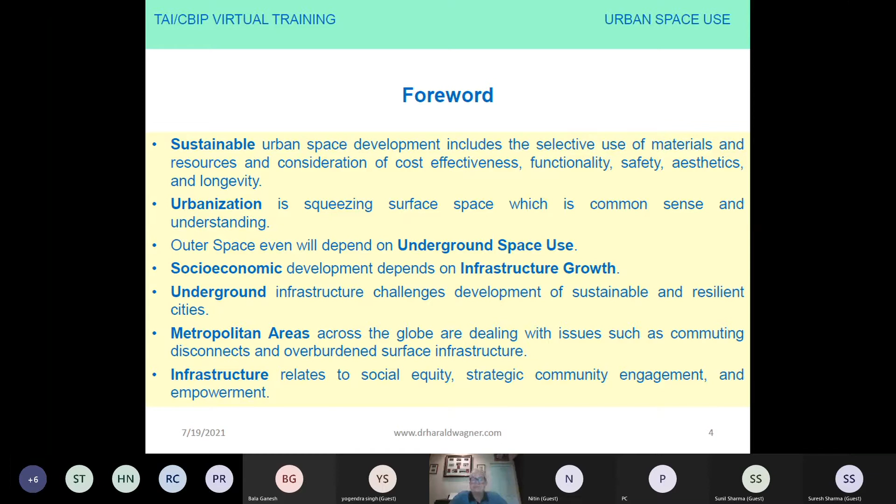The United Nations estimated in 2007 that this was the first time more people have been living in urban areas than in rural areas on a global scale. That means just 1 in 3 people in urban areas globally are living in slum households.

The history of population shows people lived in very low density rural settings, and urbanization trends match this in past centuries. That means when global population was between 1 and 2 billion people, it was not a problem at all because there was enough space at that time.

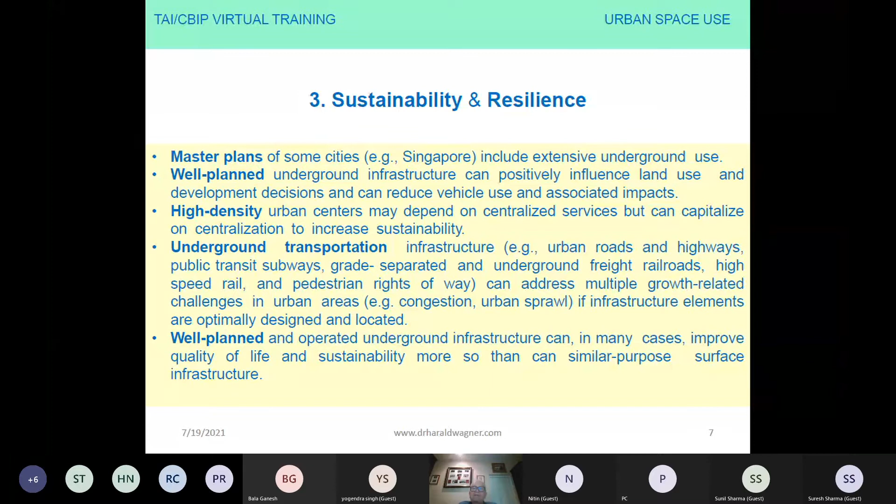In the previous lecture, we have been talking about life cycle assessment and how important it is to make long-term life cycle cost analysis. So this is reflected also in urban coordination. There is relatively little strategic coordination of underground infrastructure development right now in our city planner plans.

The administrative support and management of underground infrastructure, as part of an integrated, multidimensional above and below ground system of urban system, is vital to the development of urban sustainability.

I'd like to give you an example from Bangkok, where I'm living right now, which is to save Bangkok and to stop Bangkok sinking. Major infrastructure investment based on long-term life cycle assessments have to be implemented to provide future sustainable urban living conditions.

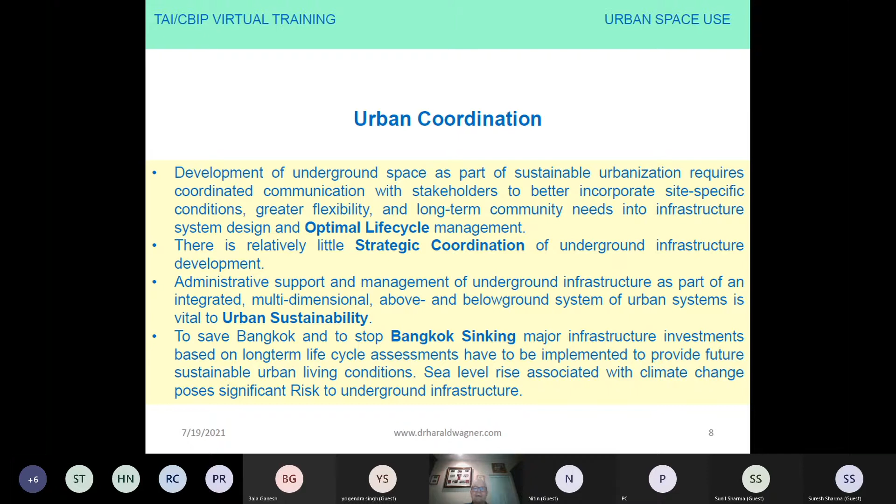Next slide, please. Now I'm going to compare above and below ground and deliberate the complexity of urban infrastructure systems.

So there are several systems which are overlaying each other, and uncertainties which are associated with system design and performance increase with greater and more varied demands on both above and below ground infrastructures.

It's a challenge for engineers and urban planners to better improve whole life cycle facility performance and overall urban sustainability with documented and validated risk-informed approaches to project planning and design, which finally comes to a balance of life cycle needs in terms of service delivery, initial cost, resilience against extreme events, and effective maintenance and operations.

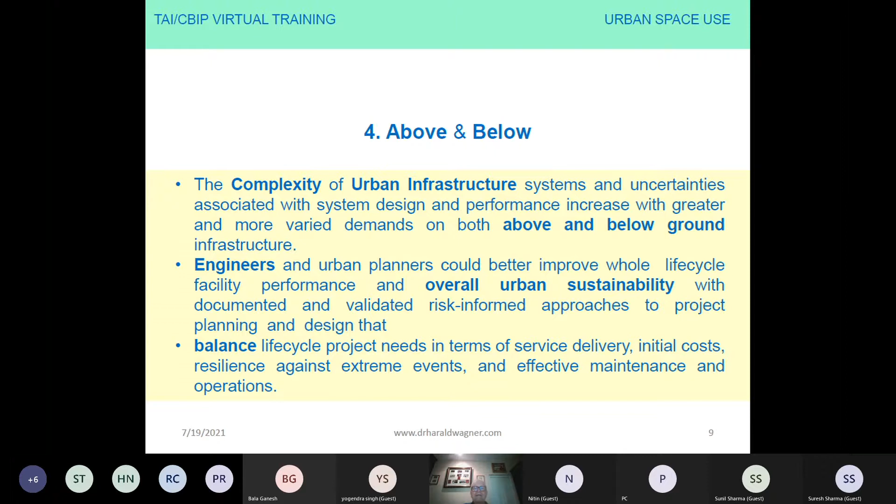There is anecdotal and partial evidence of the positive environmental and financial impact of replacing above-ground transportation structures with underground alignments on neighborhoods worldwide. So this is a big credo for underground transportation.

According to an in-depth review of the City of Boston tax assessing records by the Globe, in the 15 years since the Central Artery Tunnel project, the so-called Big Dig, began, the value of commercial properties along the mile-long strip that this year will become the Rose Kennedy Greenway increased to 2.3 billion, an increase of up to 79% in the value of the commercial properties.

That is significant - all of the above ground infrastructure has significant impact on the value also. If you go underground, the above ground structure increases in value, as shown in the city of Boston. That's almost an increase to double the citywide 41% increase in assessed commercial property values in the same period.

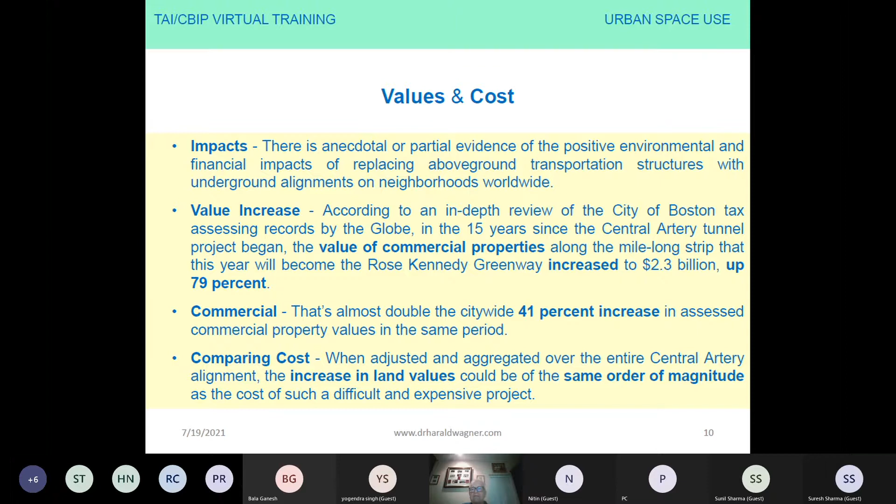The next slide shows or gives an impression of challenges and opportunities with regard to underground transport. The construction of major underground transportation projects often requires significant relocation of in situ underground utilities along public rights of way.

Yes, we still are on slide number 11. The excavation work and relocation needs of the project provide key opportunities for renewing and rationalizing utility provision in an area, to provide for easier future maintenance of those systems.

It can provide an overall benefit to the urban community using a system of system analysis rather than a project by project analysis. So system by system means overlying systems have to be analyzed as well as project by project analyzed.

Sustainability of an underground transportation system is improved when system design allows as much flexibility as possible, taking into account future use, potential for additional transportation lines, and intermodal connections. Sustainability is something provided by the underground structure.

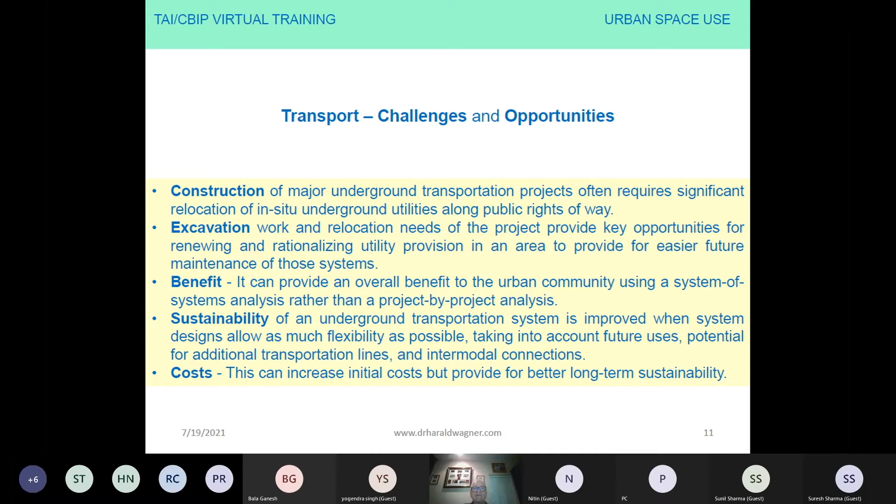And the cost can increase initial cost, but provide for better long-term sustainability. That means that we have to look into life cycle cost analysis in order to get the real picture of the cost of the investment. Next slide.

So let's talk about urban roads and highways. Underground urban roads and highways typically traverse deep below a city from a portal at each end that tie into existing service road networks. That means if we take, for instance, the example of Seoul, capital of South Korea, where we have an underground system of roads and highways extending 600 kilometers north, south, and east-west.

So that's a fantastic solution in order to release and smooth the traffic jams and to reduce the traffic complexities.

Tunnels can avoid building foundations and other in-place services and leave space closer to the surface for other future installations. Tunnels constructed at depth will be the lowest cost among alternative underground solutions if a life cycle cost analysis is prepared and geologic conditions are allowed for and respected.

The barriers to free-flowing traffic can be bypassed, travel times shortened, and carbon emissions reduced for the same distance traveled by surface road. The diversion of traffic from streets allows more pedestrian-friendly environments in the city.

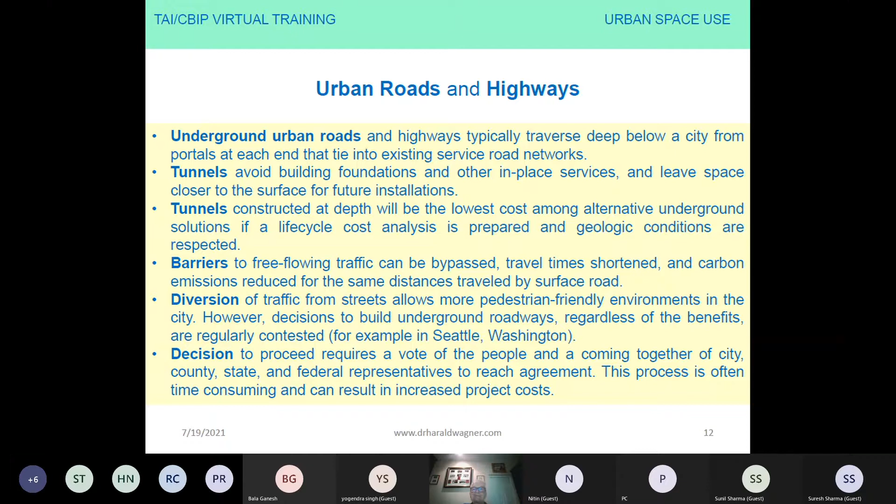Next slide, please. The next slide shows the Central Artery, the so-called Boston Central Artery project, or the Big Dig.

The next slide, please.

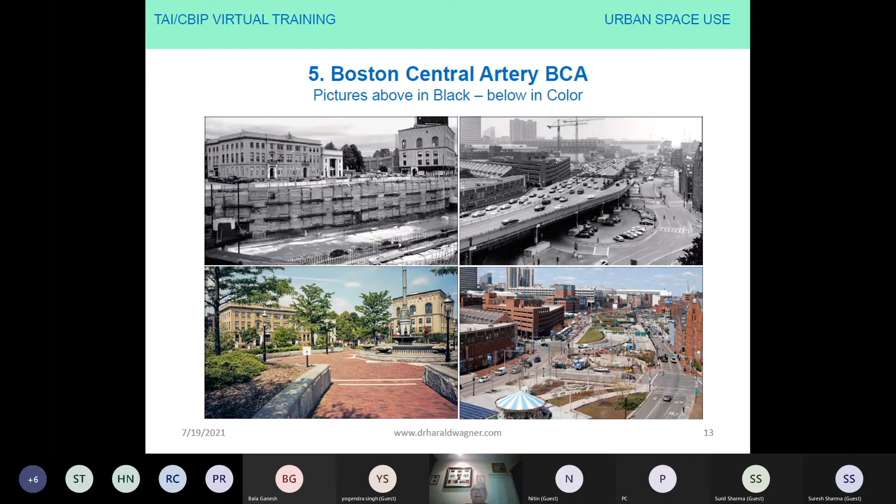When we talk about planning and assessment for a project like Boston Central Artery, the underground transportation tunnel project required rebuilding and relocating existing underground utilities in right-of-way. Building foundations make reuse of underground locations prohibitively expensive, precluding underground parking, tunnels, or other uses in that location. Underground construction may increase cost and reduce flexibility for alternative future use, because most underground facilities remain even after their useful life ends.

A comprehensive planning effort is necessary, recognizing that underground space is a resource that should be used in the best manner possible, rather than letting initial use preclude later use. Similar conclusions have been drawn with respect to limiting space debris in orbits around Earth that may prevent the use of orbits for other purposes. So planning and assessing conditions is of utmost importance.

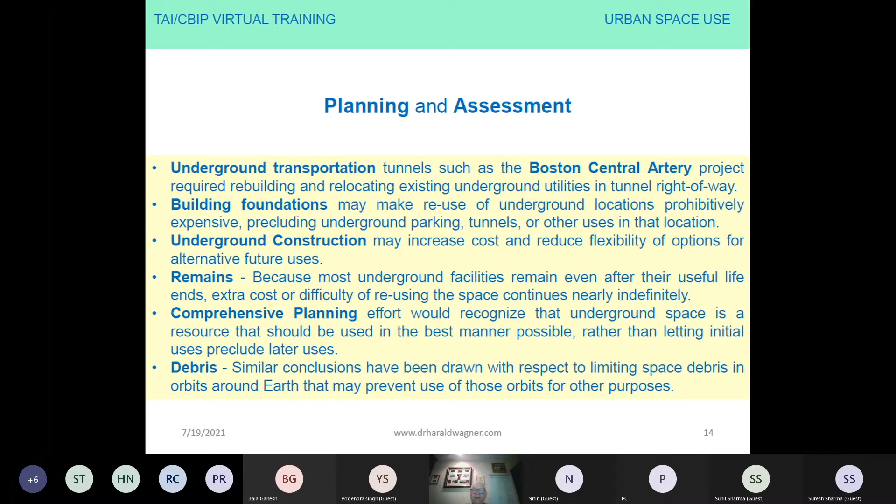Can we go to the next slide, please? This slide shows a plan of the Big Dig, and you can see this is the center of Boston. You can see that Highway Number 1 and the interstate highways are crossing in the middle of the city, and you can also see the arms of the nearby sea.

The Big Dig, it has to be confessed, was completed 9 years late and over budget by an additional $8 billion, for a total cost of almost $16 billion. Additionally, the infrastructure has suffered from a myriad of problems, such as substandard concrete failures, tunnel leaks, a fatal ceiling collapse, and the deterioration of light fixtures, wall panels, and other metal hardware.

Still, there have been many benefits as a result of the project. Traffic congestion has decreased by as much as 60%, along with a significant decrease in air and noise pollution. The space previously occupied by the elevated highway has been replaced with an urban park system, increasing quality of life. The creation of more mass transit has decreased emissions and allowed for increased expansion of the city. The Big Dig shows how transportation engineering can have a massive positive effect on everyday life. It's a wonderful example that confesses a negative aspect, but overall has resulted in very positive results.

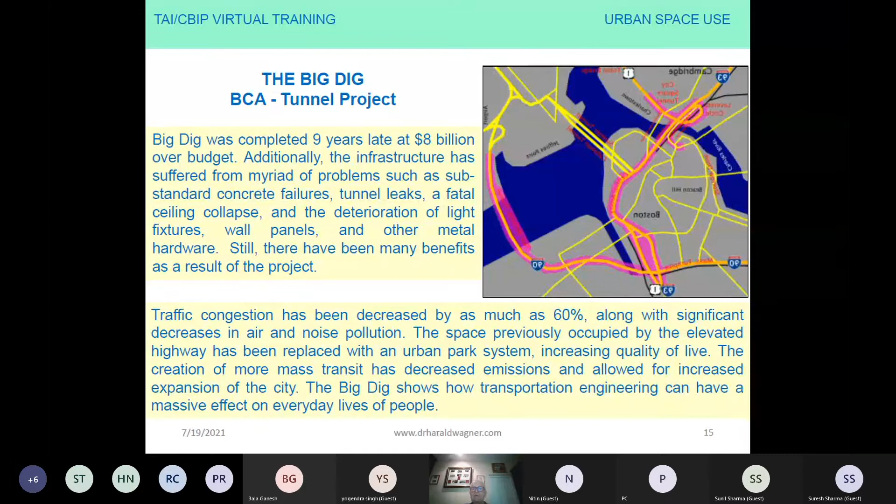Can we go to the next slide, please? This slide explains the reuse of excavated material. The excavated material from the Central Artery project, uncontaminated, was used to stabilize slopes and fill and cap a landfill to convert it into recreational areas. The material was transported in more than 4,400 barge ship loads to the island beginning in 1992.

It was used to cap the landfill with a 2-foot clay cap. The cap created an impervious layer that would serve to keep precipitation from mixing with waste beneath and leaching into the harbor. The excavated fill was mixed with biosolids from several waste composting facilities in New England to create topsoil that was subsequently vegetated to keep the cap in place. Approximately 2,400 trees and 26,000 shrubs were planted on the fill.

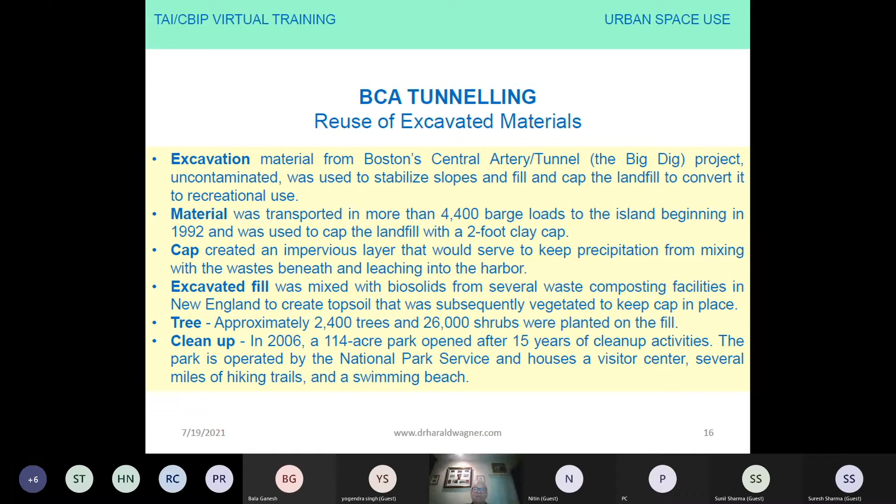In 2006, a 114-acre park opened after 15 years of cleanup activities. The park is operated by the National Park Service and houses a visitor center, several miles of hiking trails, and even a swimming beach for those who want to swim.

Next slide, please. The Boston Central Artery assessment refers to the replacement, and is anecdotal and partial evidence of the positive environmental and financial impact of replacing above-ground transportation structures with underground alignment on neighborhoods worldwide.

A very good example: according to an in-depth review of City of Boston tax assessing records by the Globe, in the 15 years since the Central Artery Tunnel project began, the value of commercial properties along the mile-long strip that became the Rose Kennedy Greenway increased in value to $2.3 billion, up 79%. This nearly doubled the citywide 41% increase in assessed commercial property values. When adjusted and aggregated over the entire Central Artery alignment, the increase in land value could be of the same order of magnitude as the cost of this difficult and expensive project.

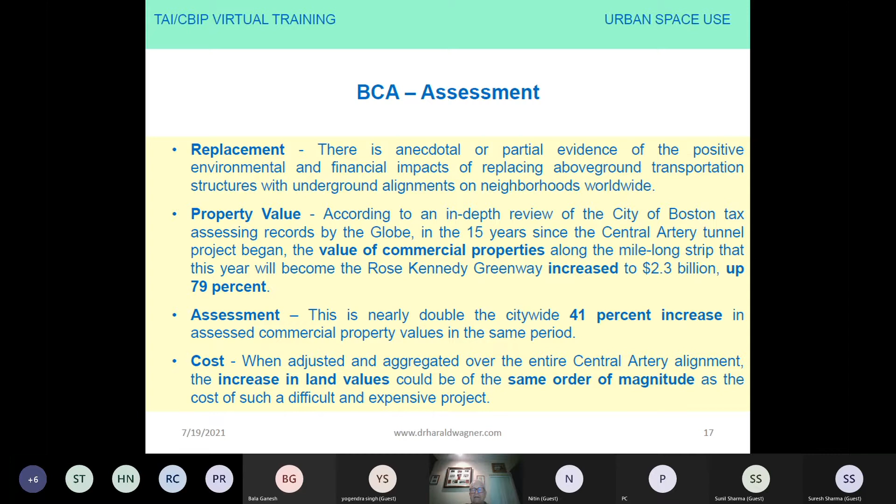Next slide. This slide shows elevated before and underground after the Boston Central Artery project, and the development to become a smart city. This is very important: even within a long tradition and long history of city development, you can make it a smart city if you go underground.

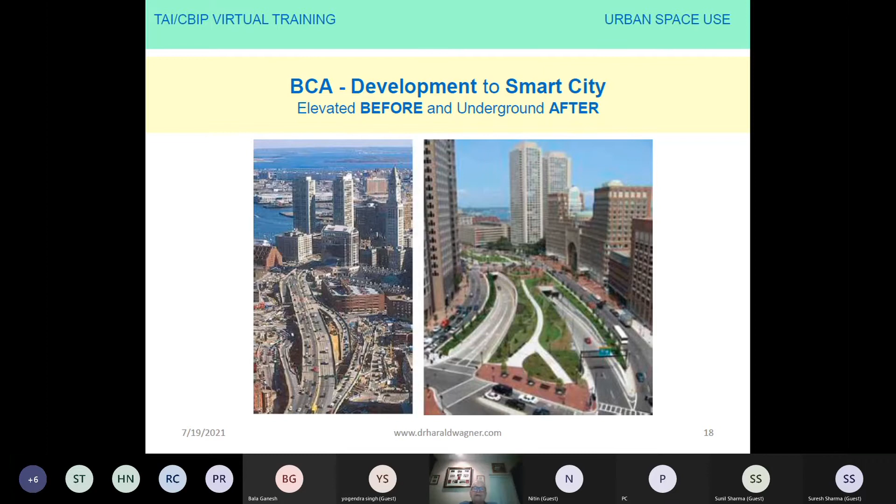That's another project on the other side of the United States. Boston is on the East Coast, Seattle is on the West Coast. A decision was made to bore an urban underground bypass expressway, remove a damaged viaduct, and restore an accessible scenic waterfront.

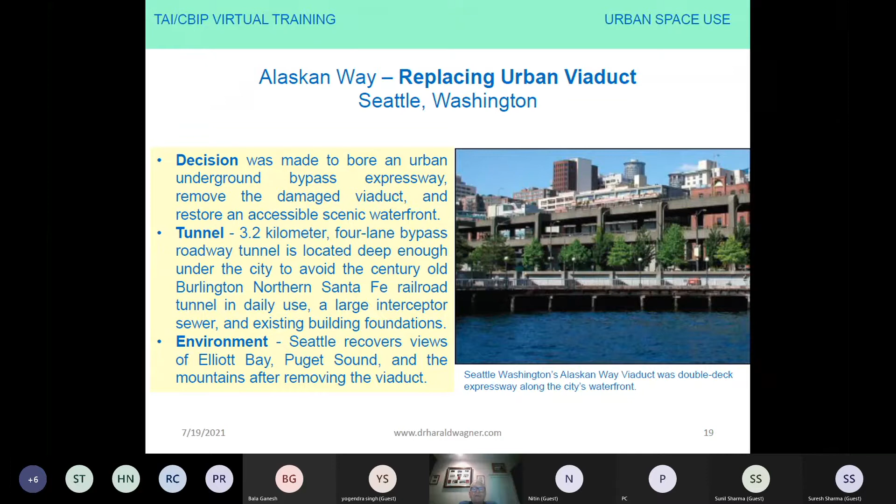The tunnel is a 3.2 kilometer long, 4-lane bypass roadway, located deep enough under the city to avoid the century-old Burlington Northern Santa Fe Railroad tunnel in daily use, a large interceptor sewer, and existing building foundations underground. The new environment for Seattle recovers the views of Elliott Bay, the Puget Sound area, and the mountains after removing the viaduct. We shall see in one of the next slides how this has happened.

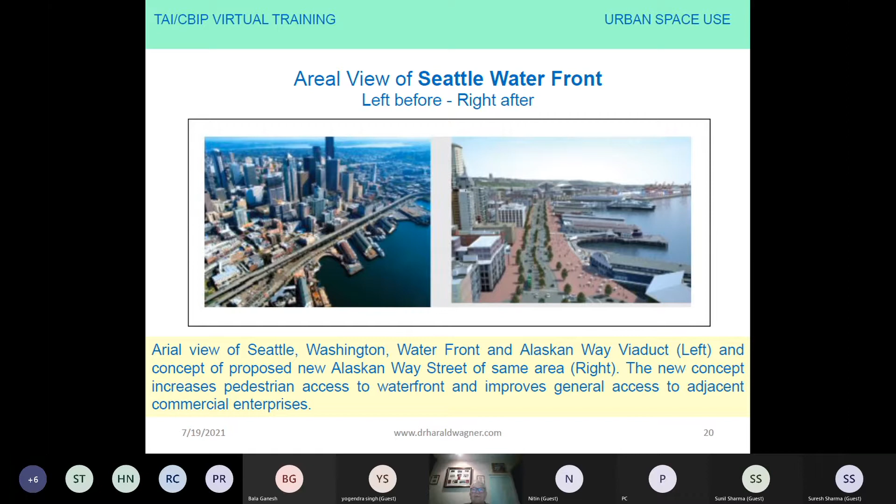It's really fascinating to go there now, if you knew Seattle before the Alaskan Way and now afterwards — it's a huge gain in quality of life. We can go to the next slide, please.

This slide shows what has been done with this tunnel, a 3.7 kilometer long solution. The alternative included a wider, 2-level viaduct on the same alignment, replacement of the viaduct by a wide surface street carrying significant through traffic, or relocation of the highway on a bridge or tunnel over or under Elliott Bay.

Doing nothing was an alternative, but it wasn't really intended, as it would limit traffic growth and create demand for better public transit only through continued, more disruptive road congestion. So the discussion was between different alternatives, and all this was publicly discussed, including all the administrative institutions.

At that time, it was the biggest tunnel, with a diameter of almost 18 meters, in order to house these 2-level roadway lanes.

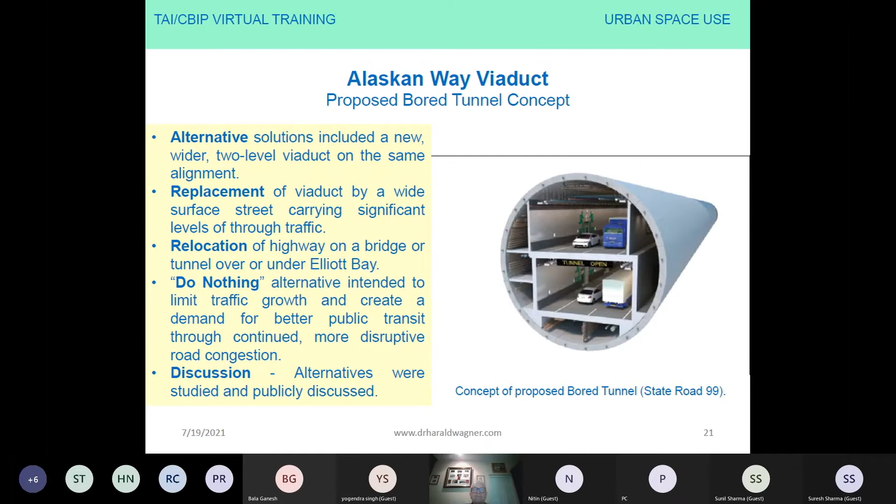The next slide talks about the change of technologies. In our cities we have aging underground infrastructure, which may be susceptible to deterioration and issues associated with changing technologies, changing climate, and societal needs. Underground space development requires a long-term commitment to technological advancement, in an environment friendly to improved planning, innovation, and implementation, all based on proper contracting.

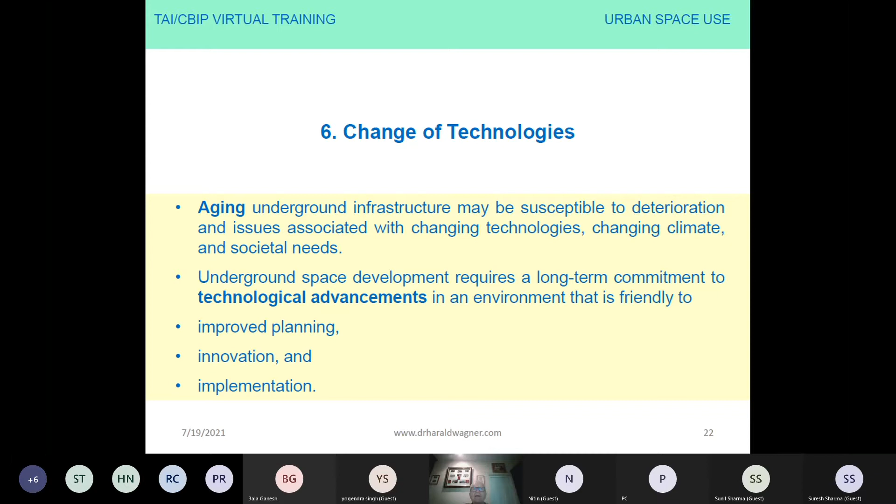The next slide shows what it means to use the underground as a resource. The underground space is a valuable but decidedly non-renewable resource — available but non-renewable. It can enhance urban sustainability only if the underground is thoroughly understood. What does it mean to thoroughly understand the underground?

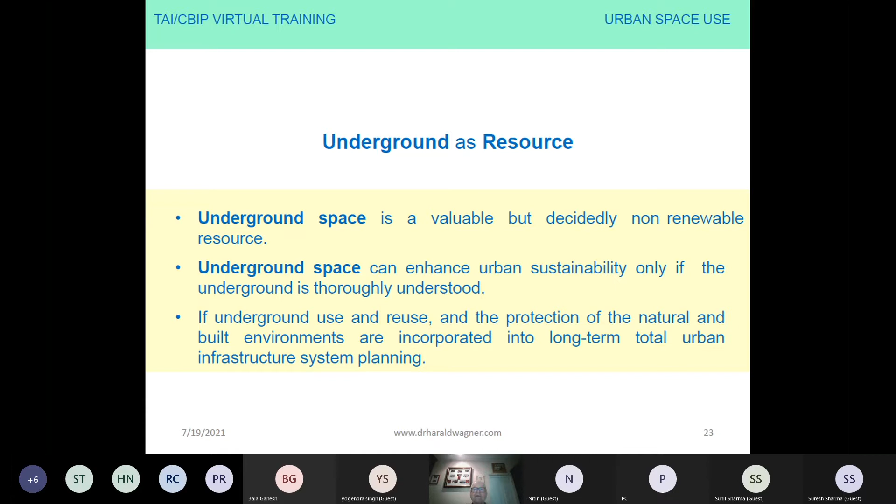It means we have to do ground investigations to reach this understanding. We've talked in previous seminars about the necessity of ground investigation to thoroughly understand the underground. If underground use, reuse, and protection of the natural and built environments are incorporated into long-term total urban infrastructure system planning, we can presume the project will be successful, benefiting everybody.

We have to follow safety regulations in our underground projects. Underground infrastructure can safely enhance the lives of millions, but few federal level safety regulations exist to guide operational safety at a time when underground system complexity is increasing.

So we actually have to look into what regulations are available and which we need to enhance in the future as we increase underground infrastructure investments. Greater acceptance and occupancy of underground infrastructure and facilities are likely if underground space is planned with consideration of utility, access, wayfinding, safety, and finally aesthetics — which brings architects into closer teamwork with underground engineers.

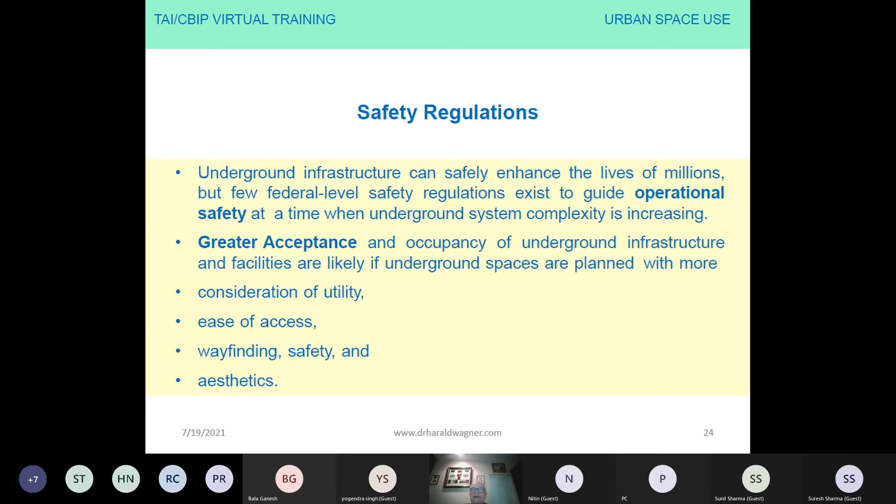Next slide talks about urbanization in principle and in general. Market forces encourage workforce capacity growth and urban and infrastructure development, but often in an ad hoc manner that may not be consistent with urban sustainability if it's too ad hoc. So planning and taking time for preparation of projects is important.

Development of underground space as part of sustainable urbanization requires expanded and coordinated communication with all stakeholders, to better incorporate site-specific conditions and provide greater flexibility and long-term community needs considerations into infrastructure system design and optimal life cycle management. So life cycle assessment, analysis, and management should become an important part of every project in the future.

Next slide: underground development is a multidisciplinary endeavor. A sustainable urban system is possible if decisions are informed by the links between social, technical, and governing elements of society, as occurs to some extent today.

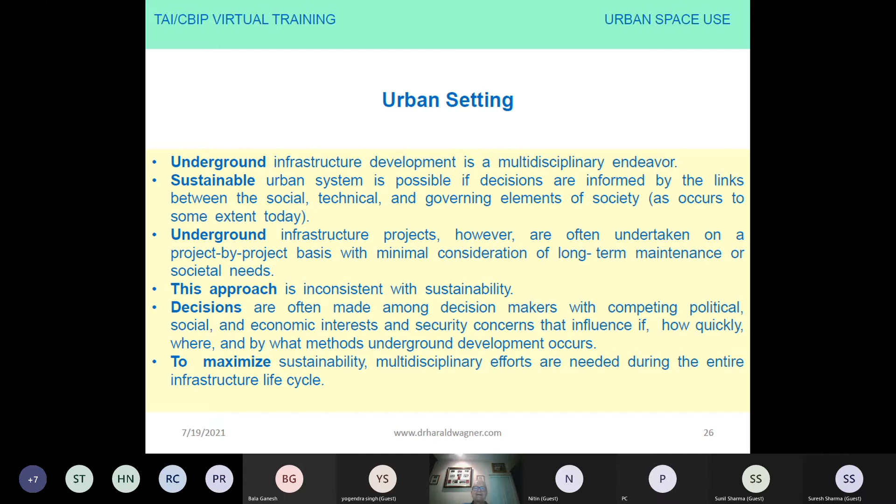So that's about urban setting. Next slide, please.

This slide talks about hazards and events. As mentioned before, on the example of Bangkok sinking and floods as hazards, definitively because of climate change. We have seen that right now, in particular in Germany, where unthinkable circumstances have developed. The capacity for flexibility is needed to address emerging issues, new technologies, and societal expectations during and beyond the operational life of underground infrastructure. New hazards associated with vulnerable and deteriorating infrastructure systems, climate change again, and security concerns may affect provisions of service, environmental quality, and personal safety.

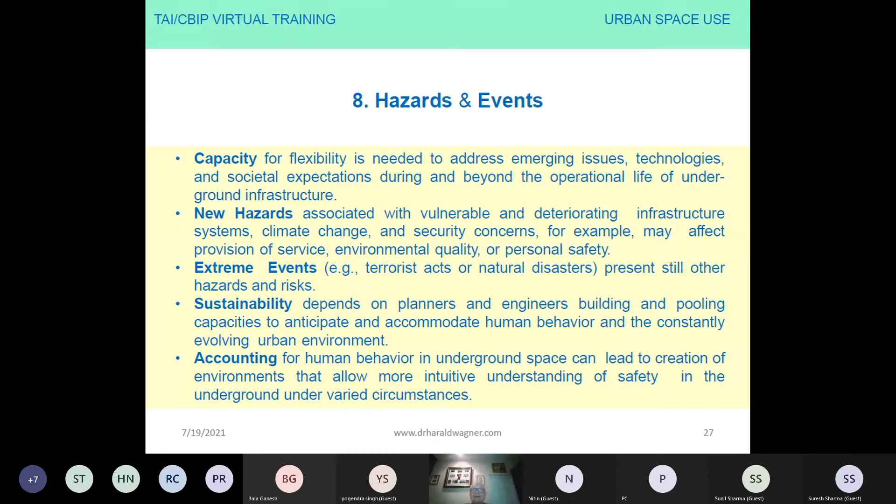Extreme events like natural disasters, terrorist acts, and so on present still other hazards and risks. Sustainability depends on planners and engineers building and pooling capacities to anticipate and accommodate human behavior and the constantly evolving urban environment. We have seen on the example of New Delhi and India how that changes over time. Accounting for human behavior in underground space can lead to the creation of an environment that allows more intuitive understanding of safety in the underground under variable circumstances. So far about hazards and events, which need consideration in the early planning stage.

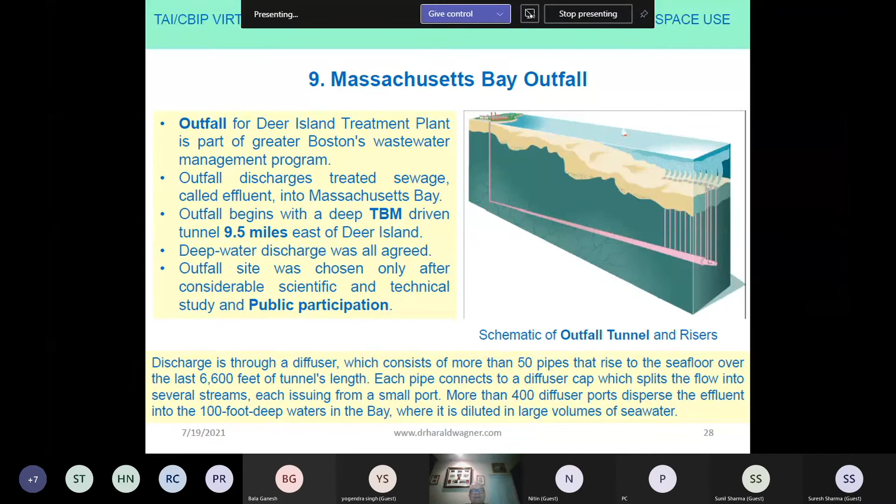Now, just to explain my own engagement at the time: I was the designer of the precast concrete segments of this 16-kilometer-long tunnel. These segments were produced in a separate segment plant in New Hampshire, about 100 kilometers north of Boston. When the tunnel construction ran into trouble, including a fire in the tunnel during construction, production of the precast concrete segments continued, and there was not a single parking place in all of New Hampshire that hadn't been occupied with storage of the precast concrete segments at that time. That was in the early 2000s.

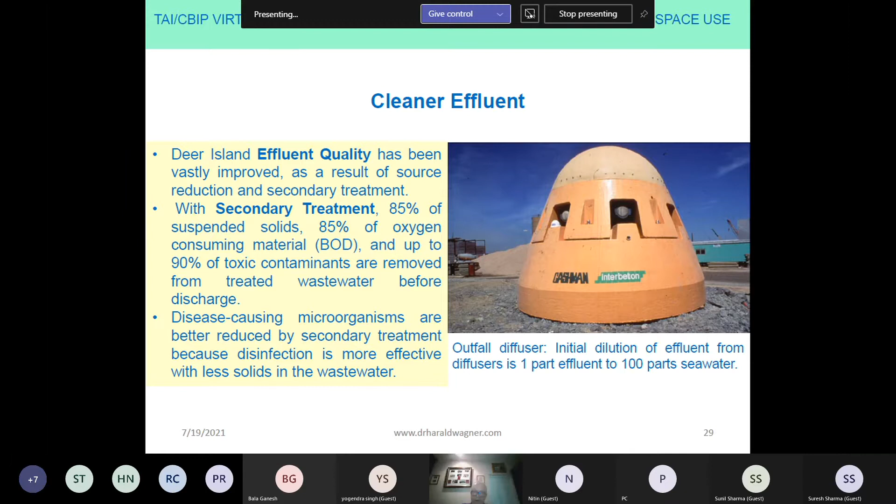The next slide is talking about transportation facilities.

These systems provide safe and efficient transportation and decrease the need for and use of automobiles, reducing congestion and travel times, which in turn reduces fossil fuel use and respective emissions. So putting transportation facilities underground in an urban environment really benefits society.

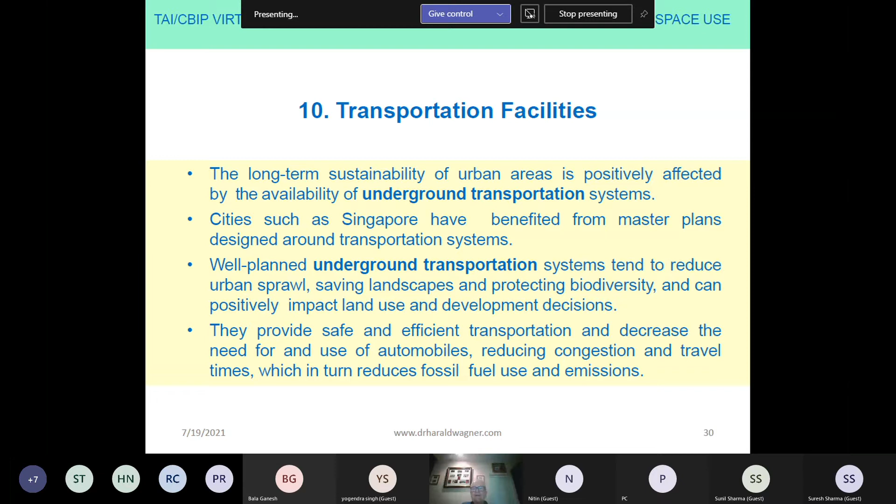There are challenges and opportunities for transportation systems which will benefit strongly from technical advances. In design and construction, new lining and underground construction technologies are needed that reduce material use and improve long-term facility performance. Underground transportation systems usually represent key infrastructure elements, pivotal for urban mobility, sustaining economy, and providing quality of life. Underground transportation systems may not be designed, operated, and maintained for their maximum contribution to overall urban sustainability.

Underground transportation construction projects require significant relocation of in situ underground utilities. Major excavation work and relocation needs of the project provide key opportunities for renewing and rationalizing utility provision. While this presents an extra burden on the transportation project, it can provide an overall benefit to the urban community. Transportation underground system long-term sustainability is improved when system design allows as much flexibility as possible, taking into consideration system design, technology change, and flexibility.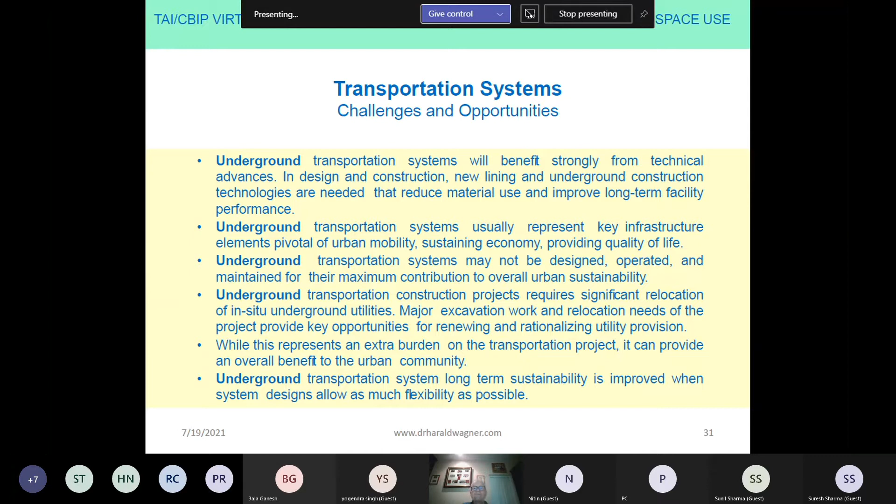This slide talks about underground urban roads and highways. Overloaded and congested urban surface arterial roads, like the Boston Central Artery, can be relocated to aerial or underground alignment to obtain grade separation between above ground and below ground. Tunnels relieve the surface of crowded traffic, relieve noise, relieve pollution and congestion.

Multiple transportation levels provided by tunnels may allow dysfunctional arterial roads to be replaced with functional surface roads. Removing traffic to a tunnel may also result in a brighter and quieter environment, improving the neighborhood and increasing property values. Underground urban roads and highways typically traverse deep below a city from portals at each end that tie into existing service road networks on both ends.

Tunnels avoid building foundations and other in-place services, leaving space closer to the surface for other future installations. Tunnels constructed at depth will be the lowest cost among alternative underground solutions if a life cycle cost analysis is recommended and prepared.

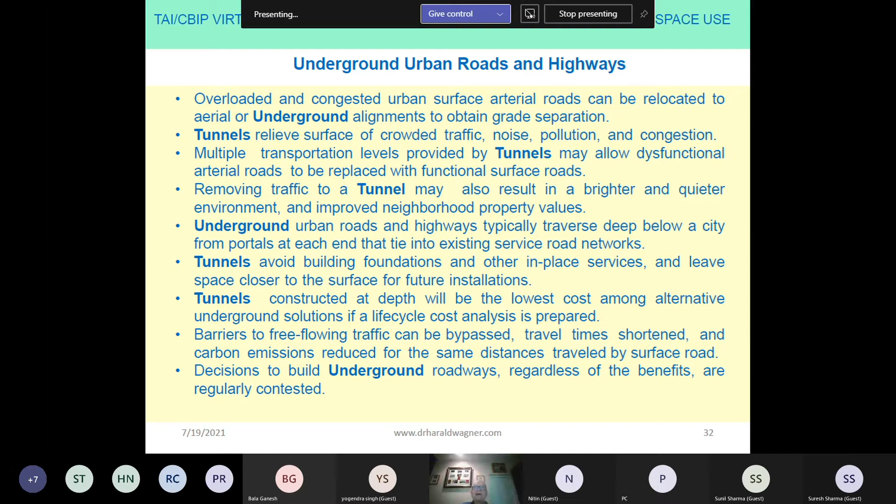Decisions to build underground roadways, regardless of the benefits, are regularly contested and have to be challenged and fought through by underground engineers.

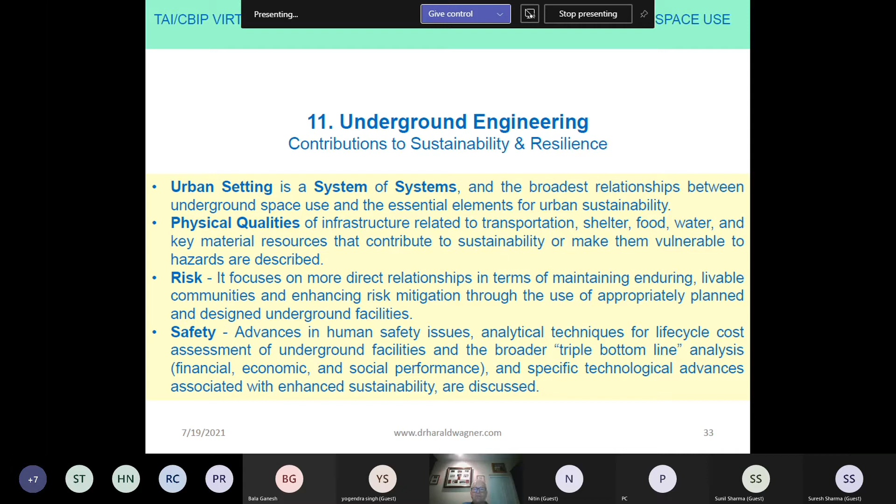The commercial, urban, and industrial facilities in a sustainable urban area must provide necessary commercial, industrial, and institutional infrastructure that supports and manages a viable economy, providing jobs and delivering support. The relationship between urban density and land prices tends to create a market for large, multi-story commercial and institutional buildings in the high-density cores of urban areas.

A future slide will explain in more detail what we understand by urban density. It can be desirable to place various types of commercial, industrial, and institutional facilities underground. However, this is not the only use of the underground that is important in the urban core area.

The increased size and density of buildings in urban core areas require an increase in the capacity of urban utility and transportation services, both in the core area and the outlying area. Underground offers protection, keeps services near the populations they serve, and allows provision of critical lifeline services and emergency response, while preserving above-ground real estate for other needs and uses.

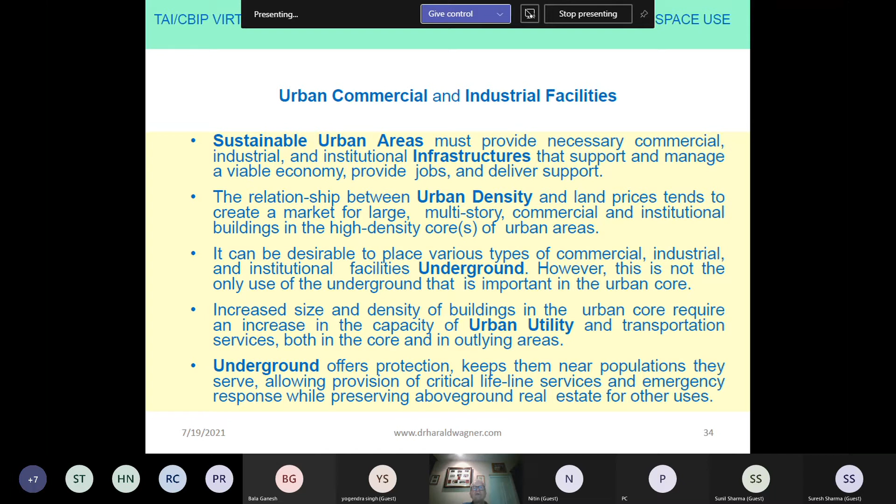Next slide, please. The next slide talks about the preservation of water resources, another important infrastructure element. Long-term urban sustainability implies that an urban area has balanced its water supply possibilities. The weight is on balanced water supply.

Where groundwater is an important water resource, a sustainable water supply would not be depleted, polluted, or diverted. Construction activities may produce runoff with sediments and pollutants that may negatively impact water quality or quantity. We are talking a lot about the pollution of water through microplastics in our global oceans.

Agricultural practice may have long-term impacts on water quality and the regional environment. Increased salinity of surface water and groundwater caused by evaporation and dissolution, and attendant changes in habitat for flora and fauna, can be the direct result of water use practices. So we have to focus on preservation.

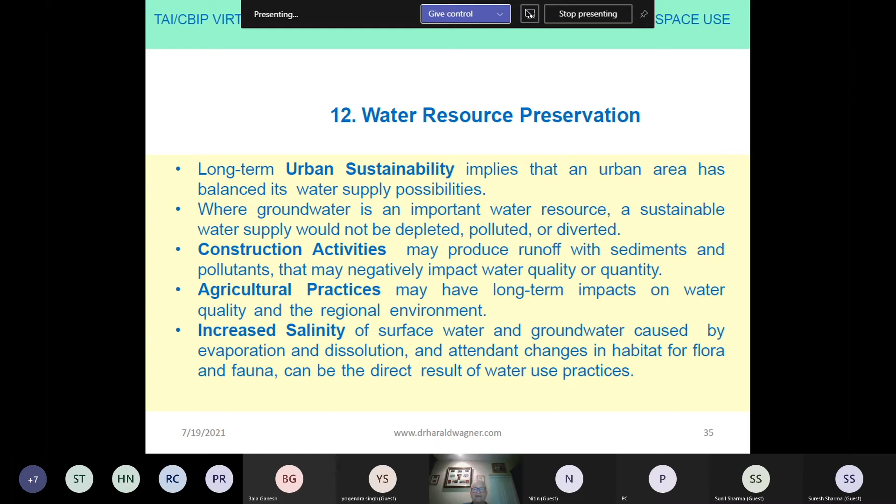Next slide, about water distribution. Good stewardship of underground water resources can include the use of the underground for urban development, because more natural landscape can be preserved for groundwater recharge. Water distribution facilities can be placed underground, allowing land to be developed in ways that enhance quality of life in cities.

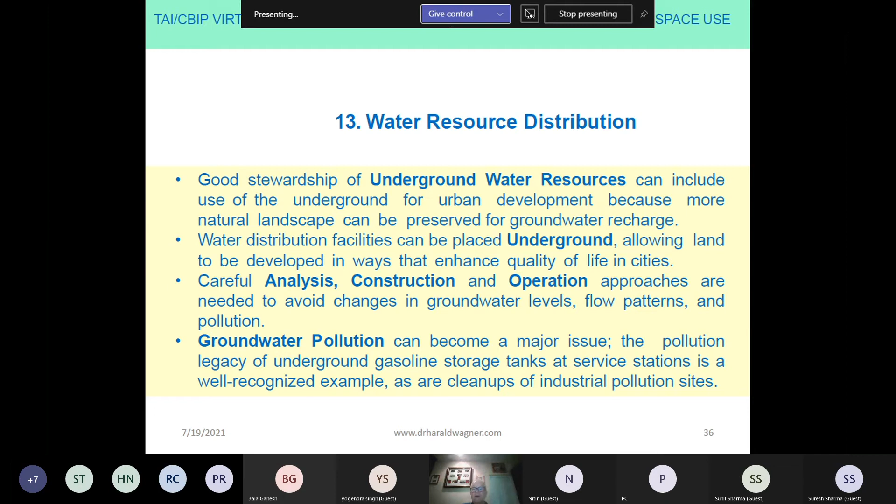Careful analysis, construction, and operation approaches are needed to avoid changes in groundwater level, flow patterns, and pollution. Groundwater pollution can become a major issue. The pollution legacy of underground gasoline storage tanks at service stations is a well-recognized example, as are cleanups of industrial pollution sites. Again, the underground solution offers the only way to get control of these polluting situations.

Now we come to the next and last slide, which shows a sort of conclusion or final word. The process of urbanization in India has a long tradition dating back as far as about 5,000 years, maybe more. The urban tradition in India continues throughout these centuries, with well-infrastructured, big and beautiful cities. In the majority of developing countries, the rate of urbanization is fast, unaccompanied by industrialization, but with rapid growth of infrastructure and service sector in economies.

The picture shows a map of India, and you can see where we have more urban density and where we have less urban density. Look at the areas of New Delhi, Kolkata, Mumbai, or Bangalore, Chennai, and so on. All these cities show how much urban density is increasing and has to be considered in the future.

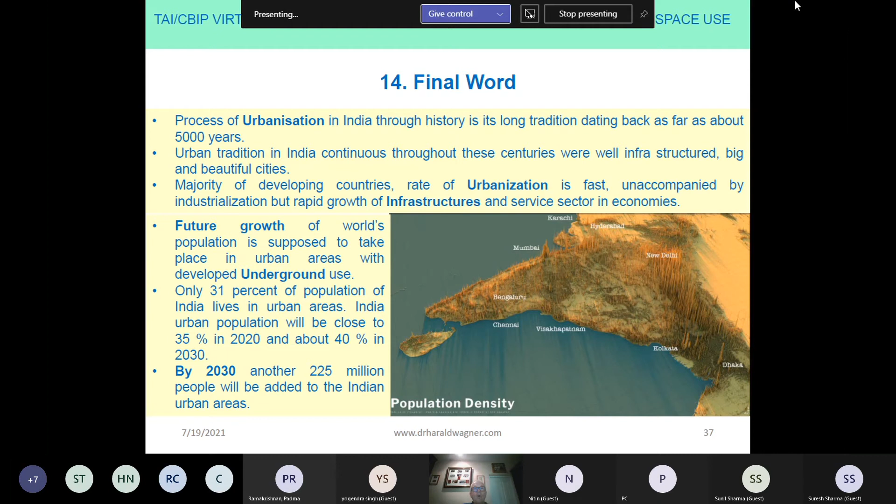So this population density chart is the final presentation of today's seminar. I would like to thank you for your attention, and assure you that any question is warmly welcome and will be responded to either immediately or in writing, whatever is preferable. Thank you very much.